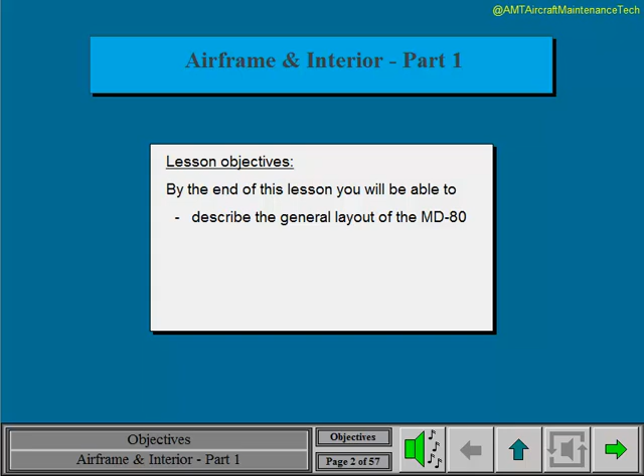This section identifies the pressurized and unpressurized areas of the aircraft. Let's start by looking at the unpressurized areas.

The landing gear is contained within the wheel wells. The main gear wheel well also holds most of the hydraulic components. The radome forms the aircraft nose and acts as a shield to protect the weather radar antenna. The wing is a single unit mounted through the lower fuselage.

The pneumatic system, the air conditioning system, and the aft stairway, together with the rudder mechanism and the auxiliary power unit, are contained in the aft accessory compartment, more commonly referred to as the tail compartment. The APU is contained within its own fireproof enclosure.

Last, the tail cone, which can be jettisoned for emergency evacuation.

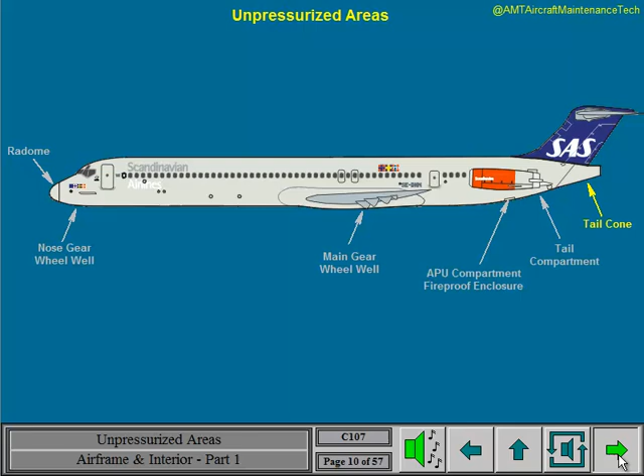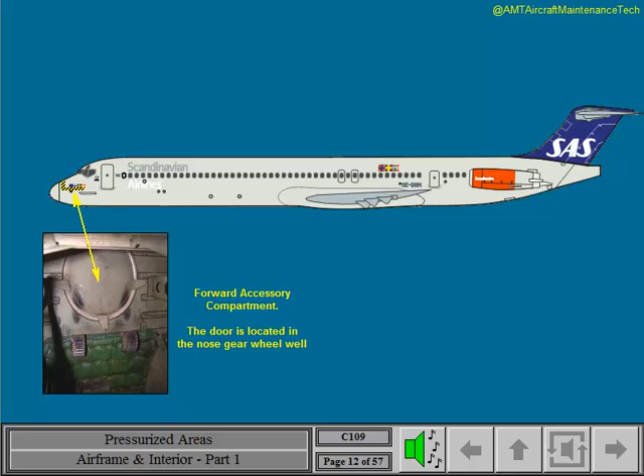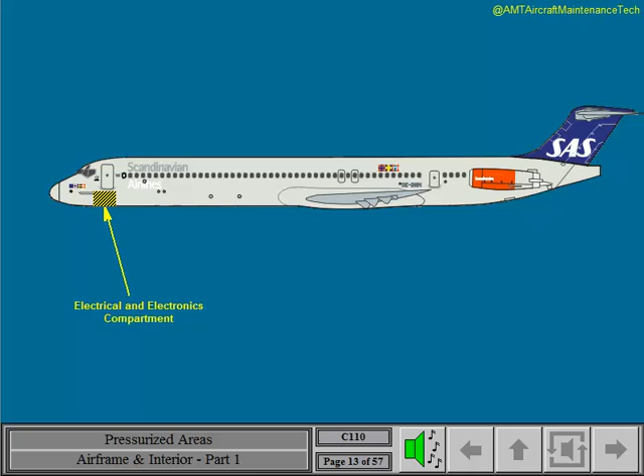All remaining areas of the aircraft are pressurized. The forward accessory compartment holds some of the electrical equipment and is reached via the nose gear wheel well. Behind the nose gear wheel well is the main electrical and electronics, or E&E compartment. It's accessed from a belly door just behind the nose gear.

The external door latch can be operated from both sides of the door. If necessary, entry to the E&E compartment can also be made from the flight deck. Access is through a door in the floor under the carpet behind the left pilot's seat.

There are 3 cargo compartments located below the cabin floor. They're called forward, mid, and aft cargo compartment and are numbered 1, 2, and 4. 3 cargo compartment doors, one for each compartment, are located on the right side of the aircraft. All cargo doors are plug-type doors, and they're similar in operation.

All cargo compartments are pressurized. The forward cargo compartment is heated and suitable for carrying specialized cargo, such as live animals. The cargo compartment heating fan provides some heating of the mid-cargo compartment. The aft cargo compartment will also have some heating from exhaust air from the cabin.

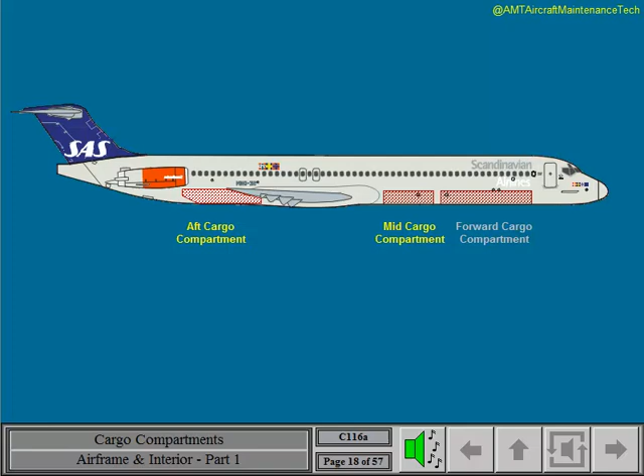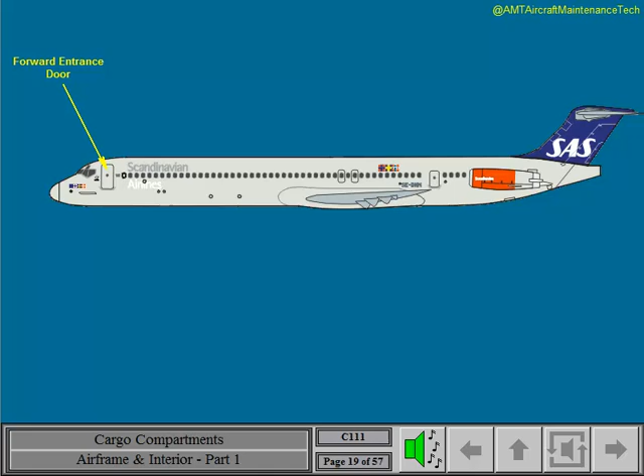Passengers enter through the forward entrance door. This is a plug-type door. It can be operated from either inside or outside the aircraft. The stairwell door and stairway are located below the forward entrance door.

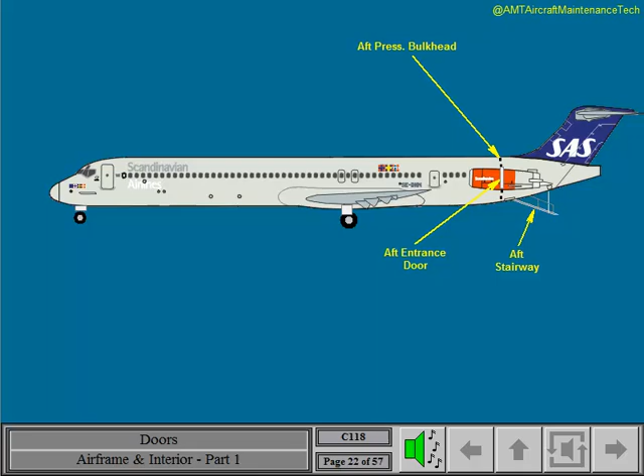2 service doors are provided, one at the right forward galley and one at the left aft galley. The aft entrance door is located on the aft pressure bulkhead. This door can be opened internally or from the stairway once it's extended.

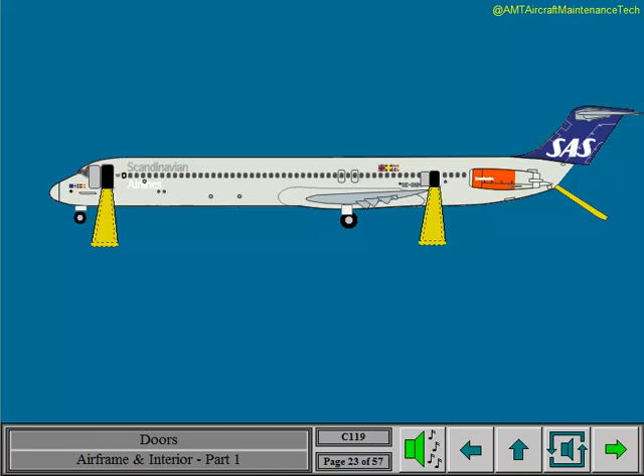The forward entrance door and forward and aft service doors are equipped with slides. The aft exit is also equipped with a slide, which can be used after the tail cone is jettisoned. There are 4 overwing emergency exits. These will be covered in a later lesson.

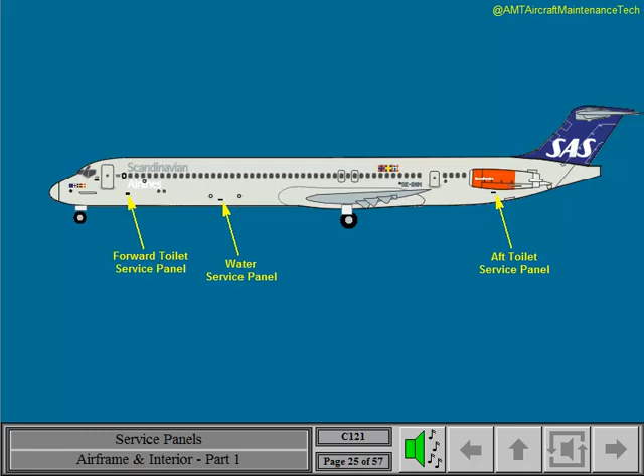Although these panels are normally used by ground personnel for servicing, you should be aware of their location. Finally, the door caution lights on the pilot's overhead annunciator panel indicate that these doors are unlocked.

Let's move on to the general layout of the flight deck. The instruments and switches are on the engine instrument panel, the glare shield panel, the left and right flight instrument panels, and the pedestal.

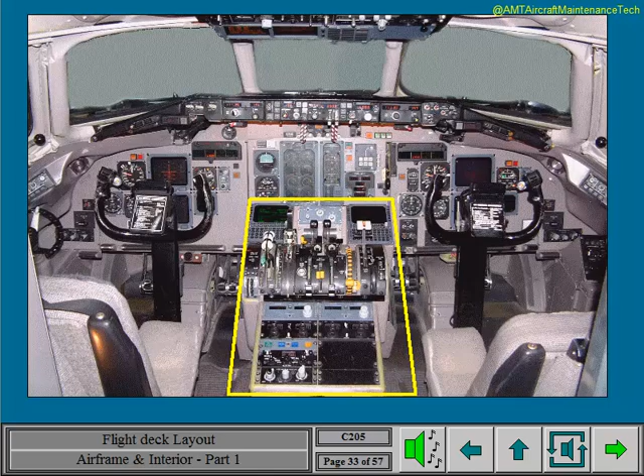Warning and caution lights are on the overhead annunciator panel. The main circuit breakers are behind the left pilot.

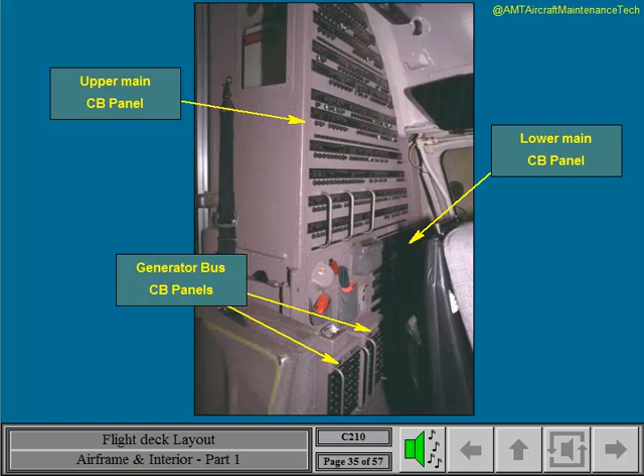The flight deck is equipped with various types of windows. Both the centre and side windshields are electrically heated for anti-icing and defogging. They're designed for impact resistance, such as collision with birds, and to withstand pressure at high speeds.

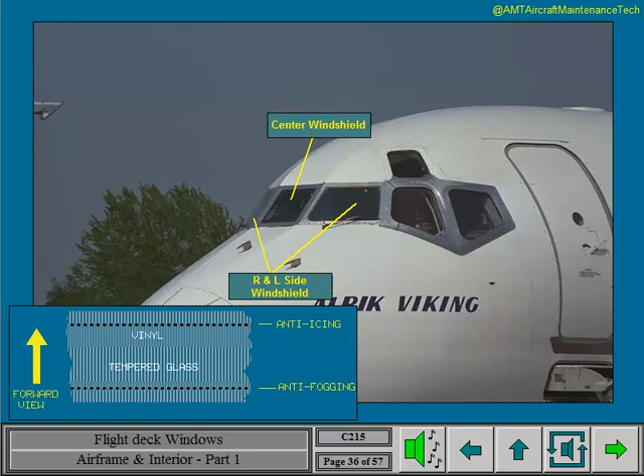All three windows are made of three-layered glass with anti-ice and anti-fog coating between each layer. Composition of the remaining windows is detailed in the AOM. The clear view and eyebrow windows are heated for defogging only. The aft windows are not heated.

If a window is cracked or unheated, certain restrictions apply. Do not attempt to heat a cracked windshield. Refer to the AOM for details.

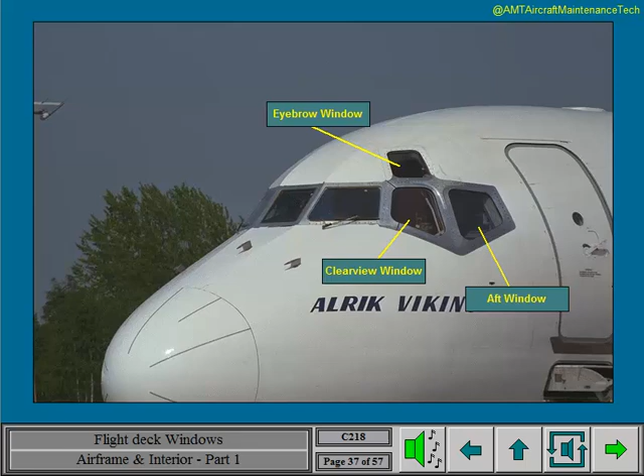Only the clear view windows can be opened. Click on the window to see how it operates.

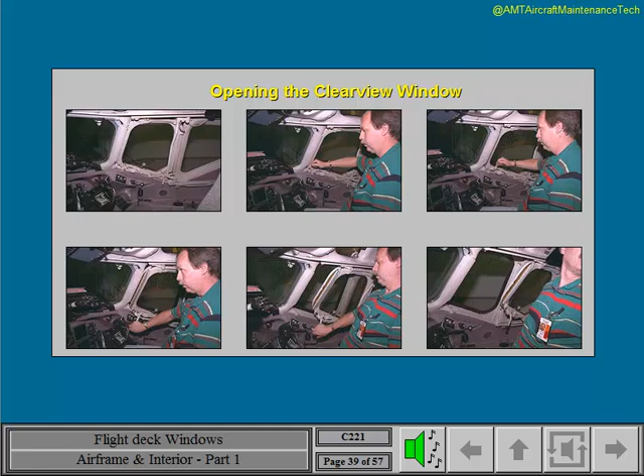First, to unlock the window, the handle is pulled aft and inboard. It'll then slide back and is locked open by the hold-open mechanism.

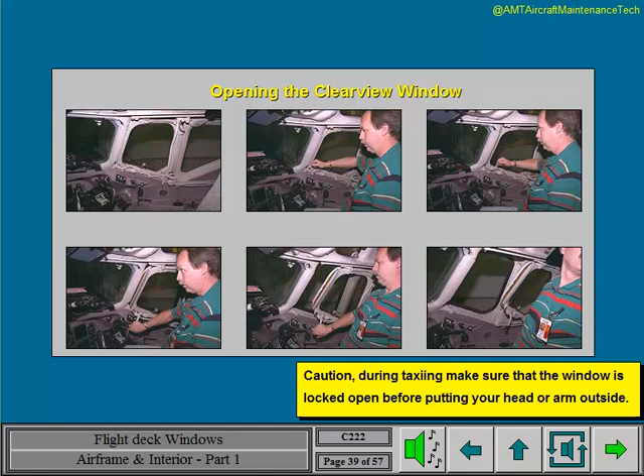In unpressurized flight, the Clearview window can be opened for better pilot visibility or for smoke evacuation. On ground, the Clearview window serves as an emergency exit.

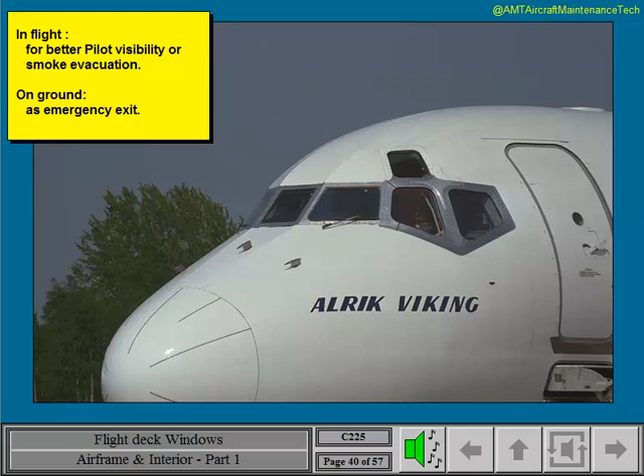Before closing the window, the hold-open mechanism has to be released. Then push the window forward to the stop, lift the handle and push it to locked position.

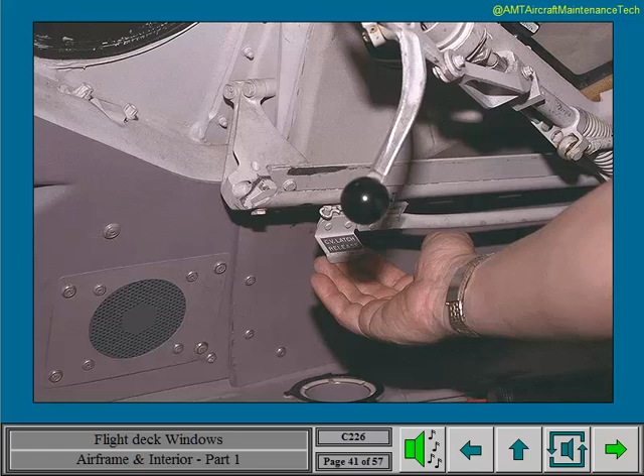The flight deck contains two pilot seats, which are identical except for position of the seat controls. They can be adjusted for height, horizontal position, and seat back angle.

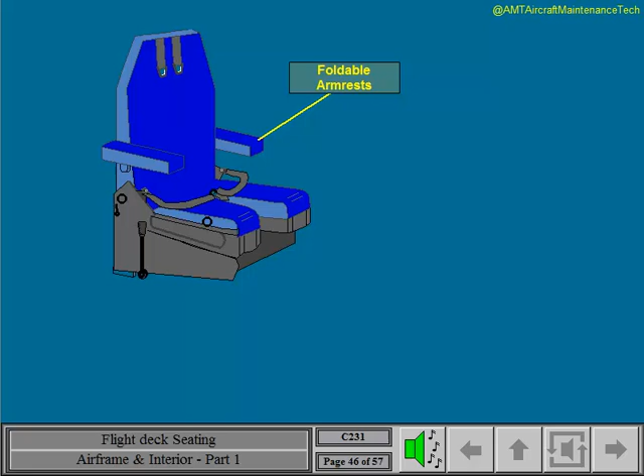For easier access, the armrests fold upwards. They can be adjusted vertically with a rotating knob.

The seats have a shoulder harness, incorporating an inertia reel complete with locking device. This locking device is used during emergency landing or to secure an incapacitated pilot.

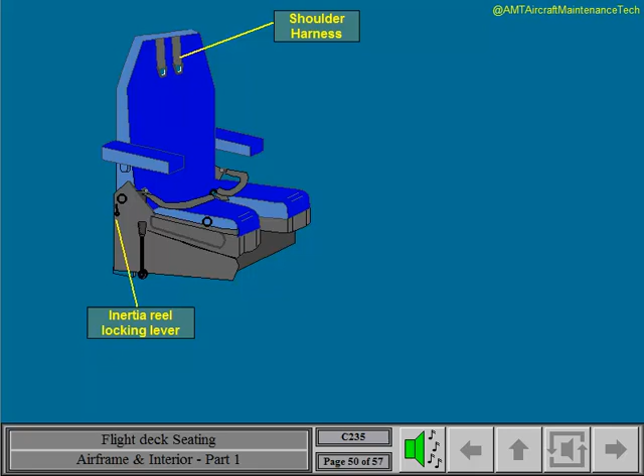Finally, the observer's seat, installed opposite the flight deck coat room. When not in use, it should be folded and stowed. This prevents blockage of the flight deck door.